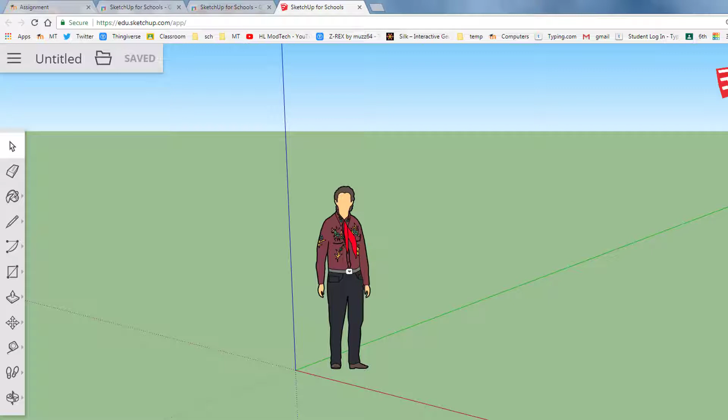We are getting ready to build items that can be printed, so we need to switch to the correct measurements. Do that by clicking the word New Model, then choose Simple Template Millimeters. Let's delete this gentleman on the screen by clicking on him and pressing the Delete key.

Before we start, let's save our work by clicking Untitled and naming it the Measurement Challenge. It asks what folder we want to put it in, click SketchUp, then hit Select, so that our work is saved and we may continue.

The first step of this project is to click the rectangle tool, choose the rectangle tool, click the origin and let go, then type 100, 20 for how many millimeters our first shape is. I'm guaranteeing you that's the first shape.

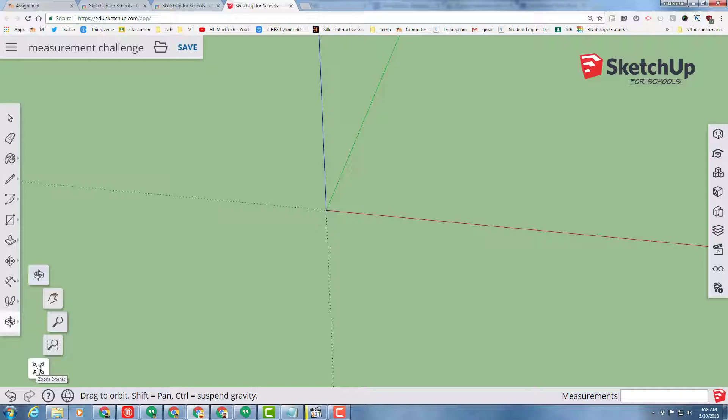Notice we can't see it. That's because we've been working in feet and inches, and now we're working in millimeters. So we need to click the bottom tool and choose Zoom to Extents so we can see our cool shape. That allows us to zoom down to its tiny size, and then we need to add the dimensions to prove that it's perfect.

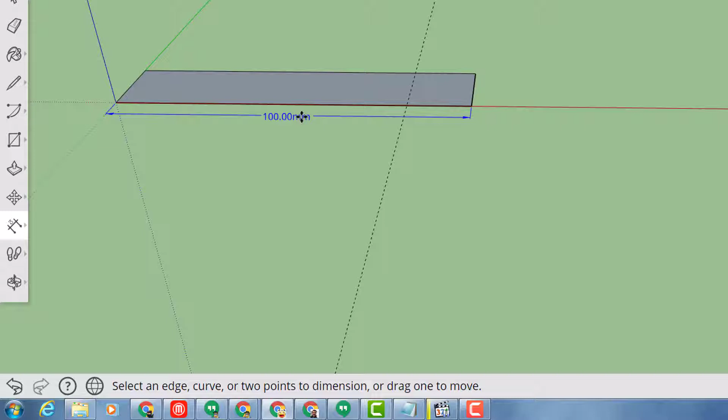When you click the Dimension tool, just click the first edge, click the last edge, and then pull away a little bit to mark it as 100 millimeters. For the next one, click all the way away from that shape, click on the other front edge, and label it as 20 millimeters. Those are the only measurements I'm going to tell you in the movie.

For the rest of the movie, you need to look at this picture. That's what you need to do: draw a 100, 20, and then start adding the other parts.

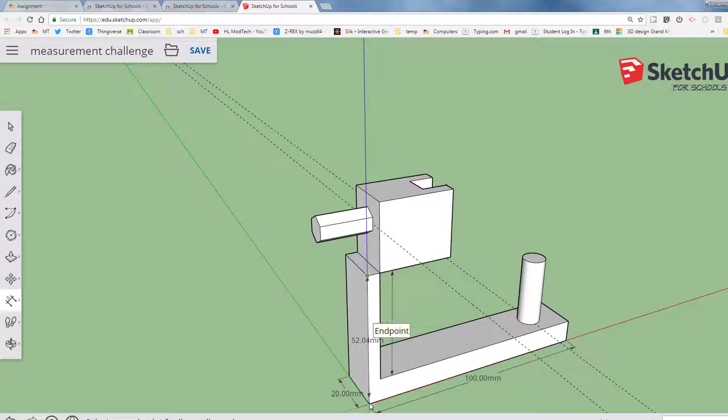I'm going to prove to you that this distance is 45 high. This distance is 55 high. This distance is 5 millimeters wide.

Notice I zoom in so that the labels are easy to see. I'm going to show you that this distance is 30 millimeters high, and so on and so forth.

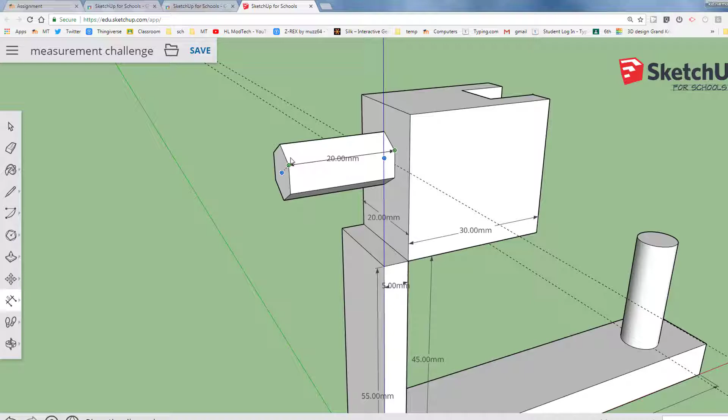So you just have to look at this movie and find all of the possible measurements, and then build an exact copy without me explaining the tools.

Alright, you can look at this video, and I'll let you watch it as many times as you need. I'm going to show you once again.

You've got your 45 for this gap. This will be 30 high. Remember, that's 100. This is 10.

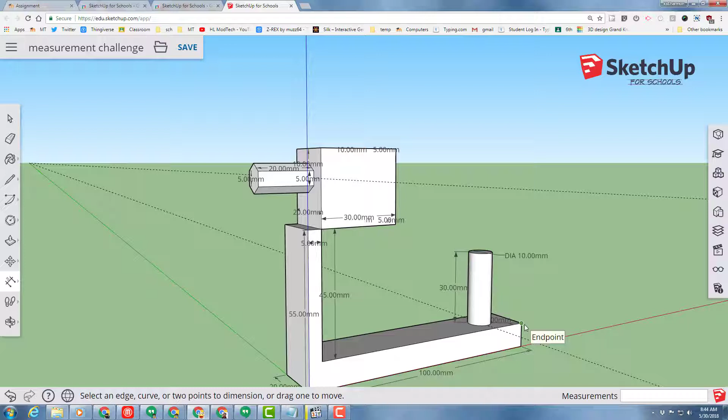When you demonstrate your perfection, make sure you mark all of these as well. This cylinder is 30 high, and it's got a 5 radius or a 10 diameter. It is 15 millimeters back.

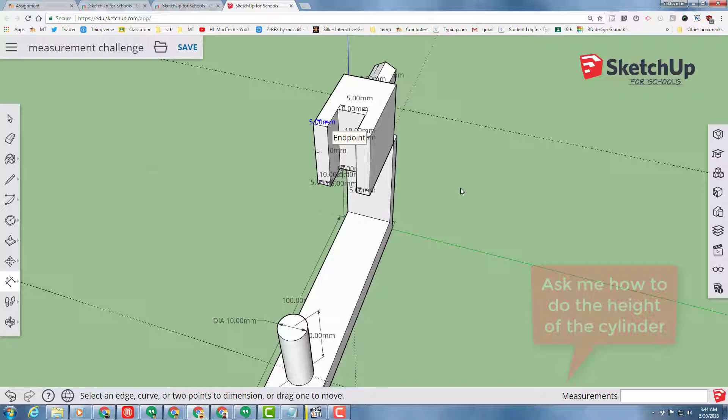This hole is cut out. It's a 10 by 10 with 5. And this hexagon on the front is 10 millimeters down and then 5 on a side.

And then if we look at it from the side, it has a length of 20 millimeters. So without any actual steps, you need to build and label this exact same shape using SketchUp for Schools.

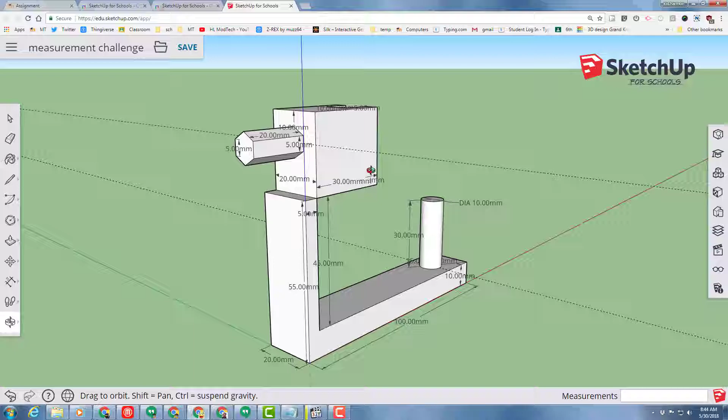When you're done, call me over, show me the measurements, and you'll be able to head on to the next lesson.